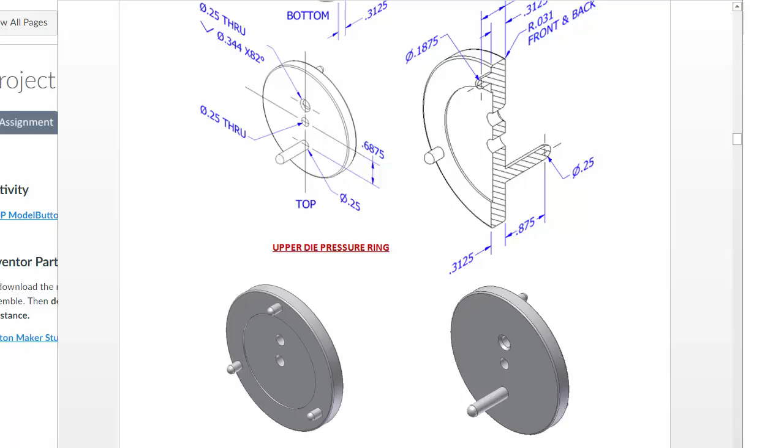We know the cylinder has some diameters here. We have a diameter of 3.0625, and then there's a smaller cutaway of 2.0625 that has a depth cut of a very small amount on it of 0.031. So I'm going to begin by creating that.

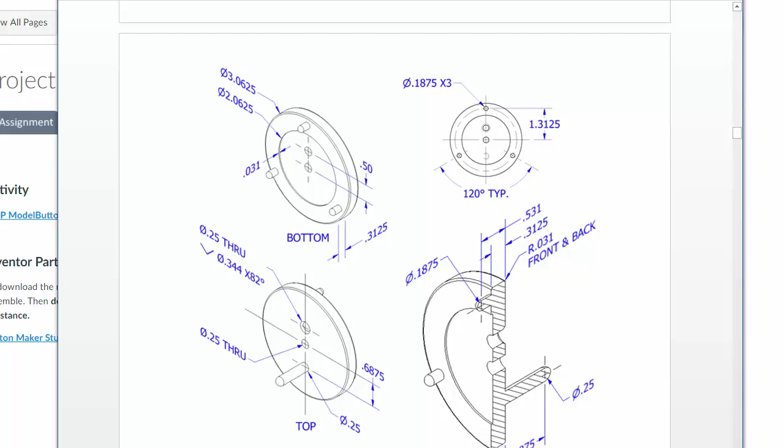In Inventor, I'll create a new sketch. I'll go ahead and build it on the XY plane, and because it's a cylinder, I just want to make sure that my center point is the center origin here. That'll save me a lot of trouble later on usually. And I'll begin with 3.0625.

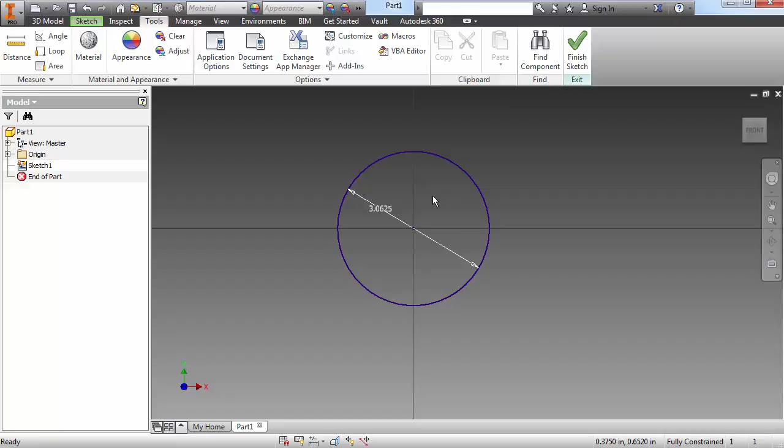You'll notice that it only goes to 3 decimal places by default in Inventor. The number is correct, it is to 4 decimal places here, it just rounds it up for you visually. You can change that if you come into Tools and choose Document Settings, then come over to Units and set your precision to 4 decimal places. Then when I apply this, it'll show me the correct number of decimal places. So that's something nice to do.

I'll finish the sketch and extrude that, and I'll extrude this one 0.3125, and then I'm going to build this smaller and extrude that, the smaller cylinder here, and extrude that in.

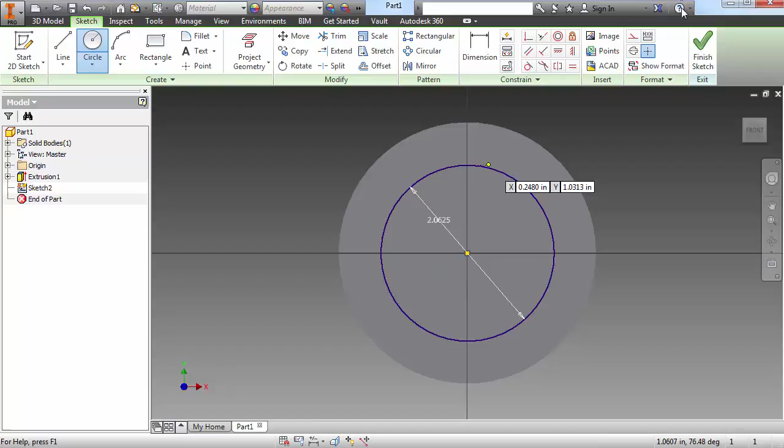So I'll come here with the same center point of 2.0625, and then I can extrude this with a cut here, and it's only got a depth of 0.031, and that gives me that correct depth cut.

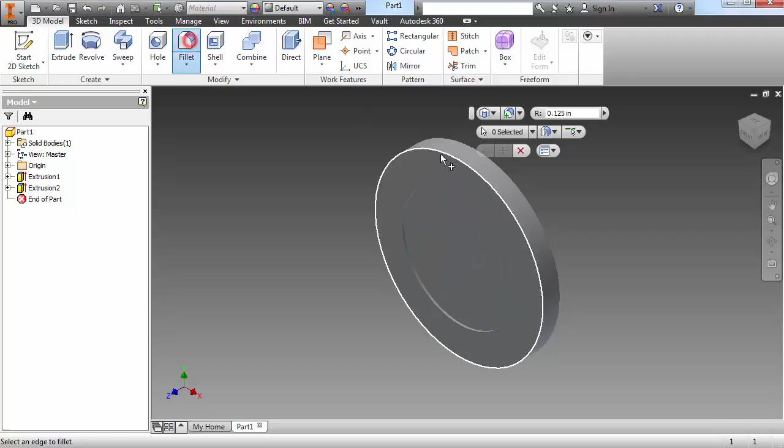Now there's a couple of other things I'll need to do. There's a fillet of 0.031 on the front and the back, so I'm going to come here and do fillet, and I've got right here 0.031. Do that again, I've got a fillet here and here, and that should be good for the cylinder itself.

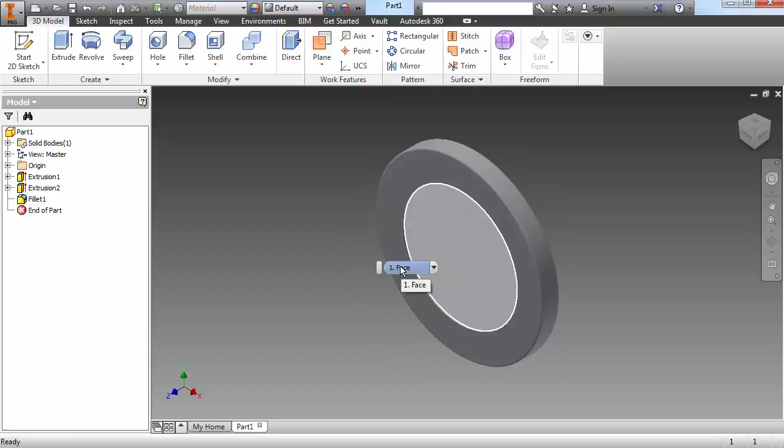Now I need to start building these extrusions that are all the way around. These are equally 120 degrees from each other, so all I need to do is build one and then use a circular pattern to make a pattern of the feature for the others. So let's begin with that one.

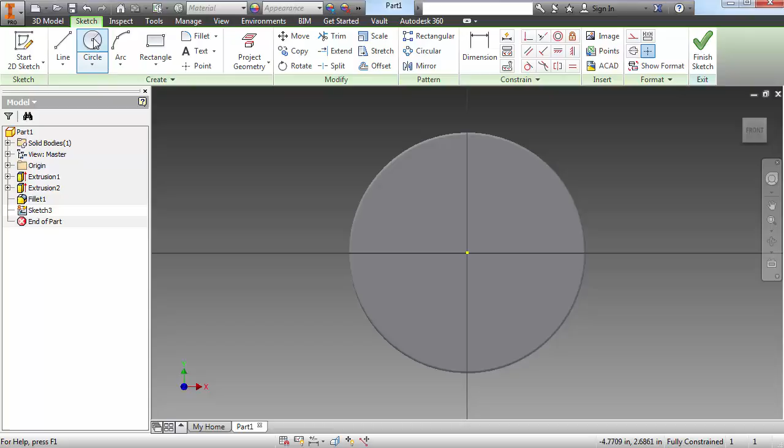I know a couple of things about this. I know that it is on a vertical axis straight from the center point, and it's 1.3125 up from there. So I'll go ahead and build a new sketch here, build a circle of some size right here, and the distance when I hit D and dimension between the center circle and up here should be 1.3125. The diameter of this circle here will be 0.1875.

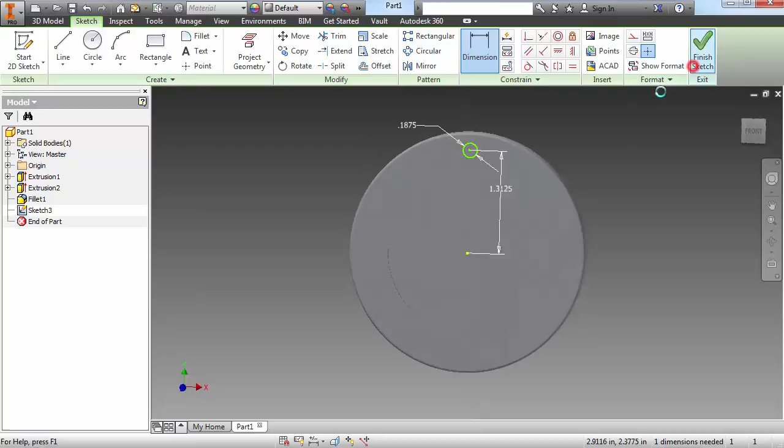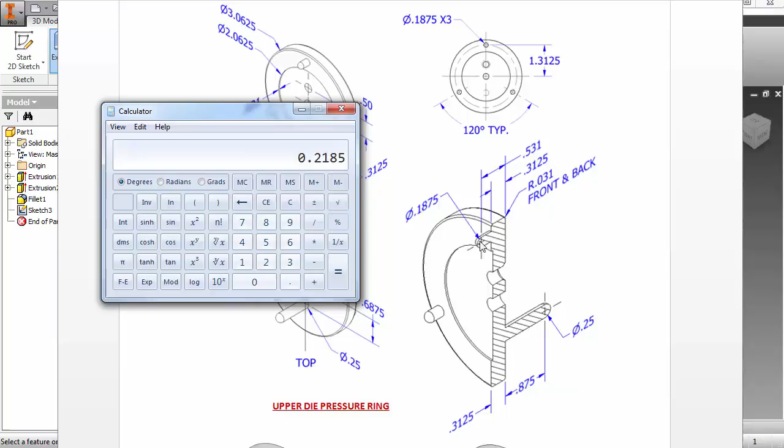Now I will extrude that. From the back of this to where the fillet begins is 0.531. So if I take 0.531 and subtract the thickness of the cylinder of 0.3125, that gives me a distance from this edge to the center here of 0.2185. So I'm going to extrude this out 0.2185. Is that what I said? Yep, okay, then I've got that.

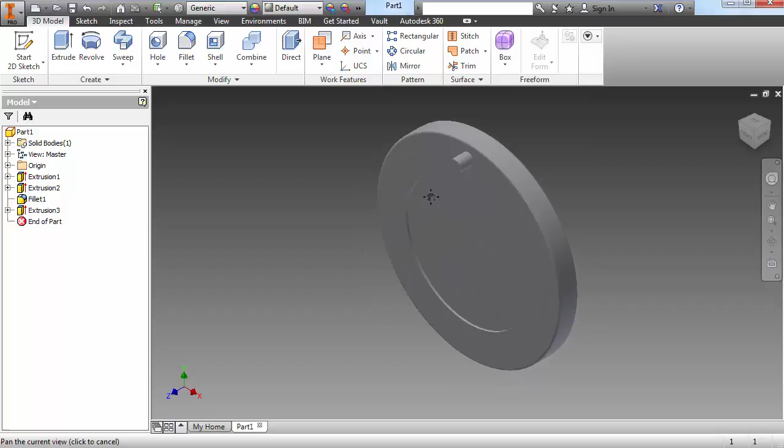Now, to build the extrusion or the fillet on this, I need to extend this out a little bit more. So I'm going to go ahead and build a work plane right in the center of that. I'm going to choose my work plane, and in my origins, that YZ plane origin should already be there. So I'll create a work plane right in the center here, and then click on the edge of that work plane and create a new sketch on that.

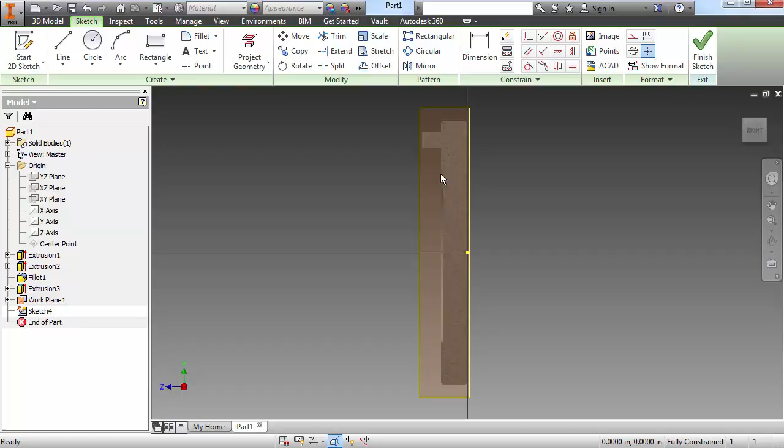And I'm going to press F7. F7 allows me to do a cutaway, just a temporary one for the purposes of this. So now my work plane is cutting away there, and you can see what it does to show you that that material is gone. And now I can create, I'm going to project this thing.

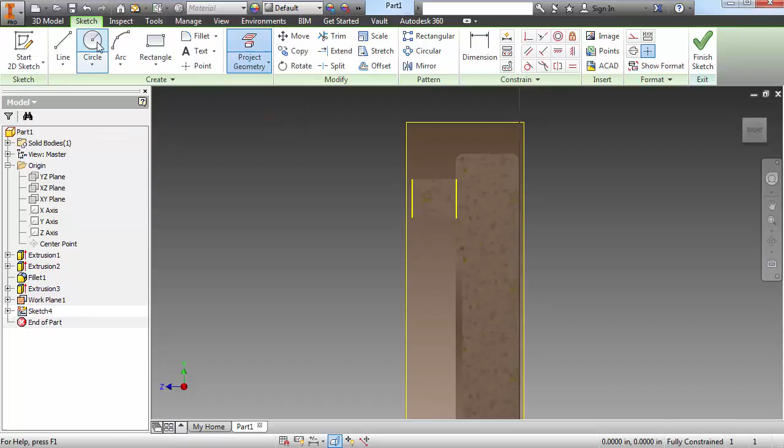And I'll build a circle here. I know that circle starts here, and I'm assuming it has a diameter of 0.1875, just like that. Now I'm going to revolve this on the top, so I only need half of this circle, which should already be the right size because the center is here and I dragged it out to the edge of this.

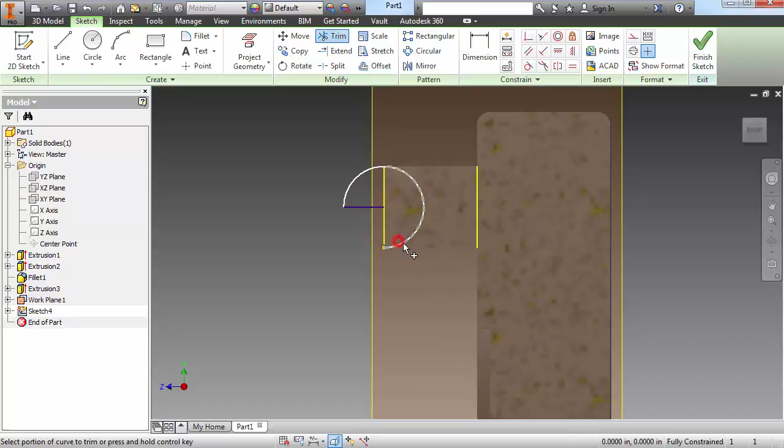But if I just draw a line here, use the line tool to draw this, then I can press X and trim the parts I don't need, and that should be fine. And now I can revolve this half of that shape around there. So I'll choose revolve.

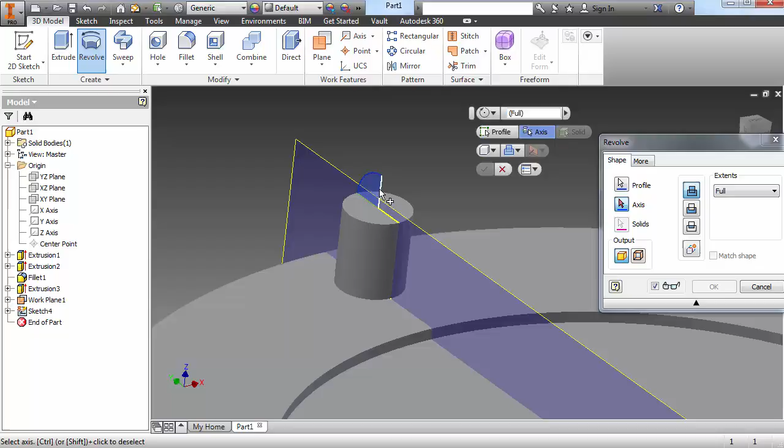It already found that profile because that was the only one available, and now it's expecting me to give it the axis. This red arrow represents information it needs, and the axis is going to be this center line here. When I click OK, that should cap the top of that.

Now I can't delete this work plane because it's needed to create that thing I drew, but I can right click on it in the browser and say visibility off, and that's all I need to do for that.

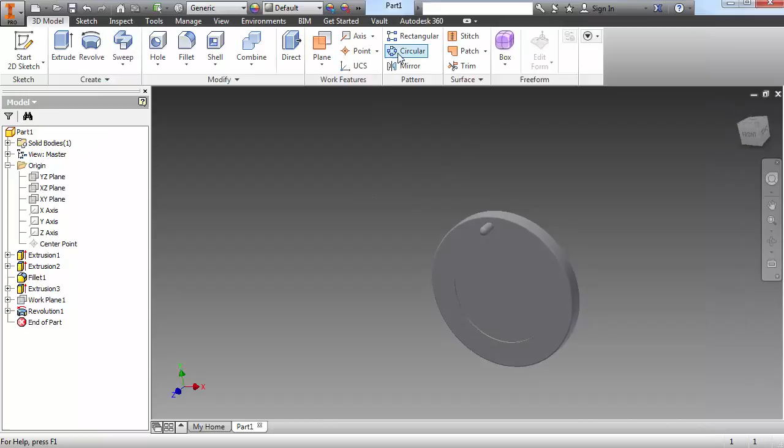Now I know there are two other ones of these. They are equidistant from each other, all 120 degrees around this center point, which means I can use a circular pattern here. I'm using a 3D feature circular pattern. The feature is both the cylinder and the revolve on the top, so I need to make sure to select both of those.

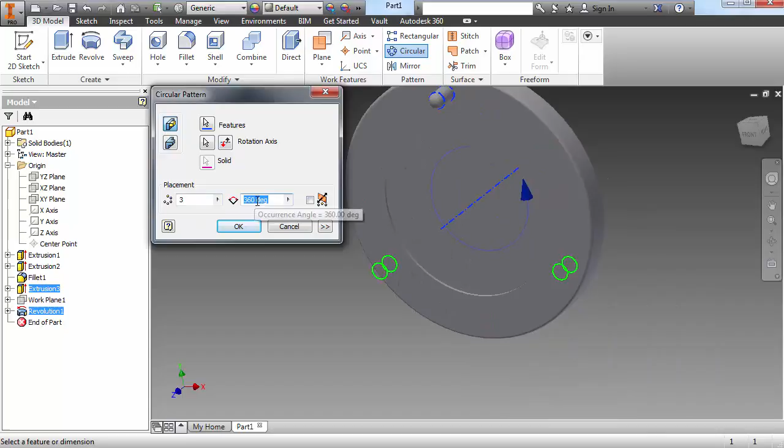The rotation axis is just any other circle. I can click on any rounded surface that shares the same center point, which should be everything else. If I click on this now, that should share that same axis. I only need 3 of them, and 3 at 360 degrees will give me my 120 degree angles, and that's that part of it.

Now I need to do basically the same thing on the back. There's a much farther away one. It is on the other side, but it is also along that vertical axis, vertically centered on the circle.

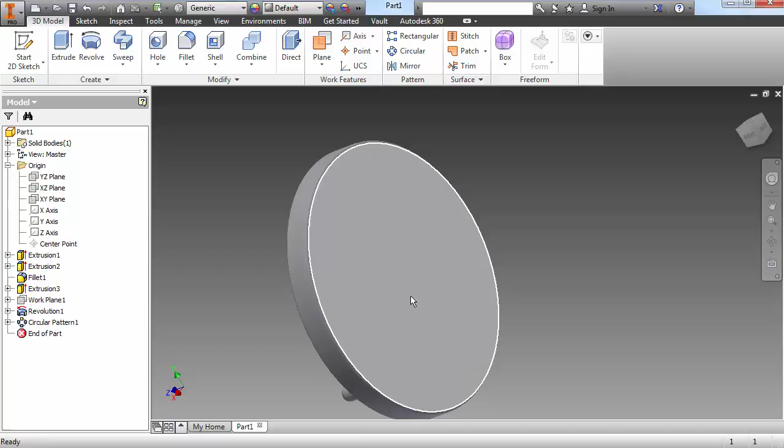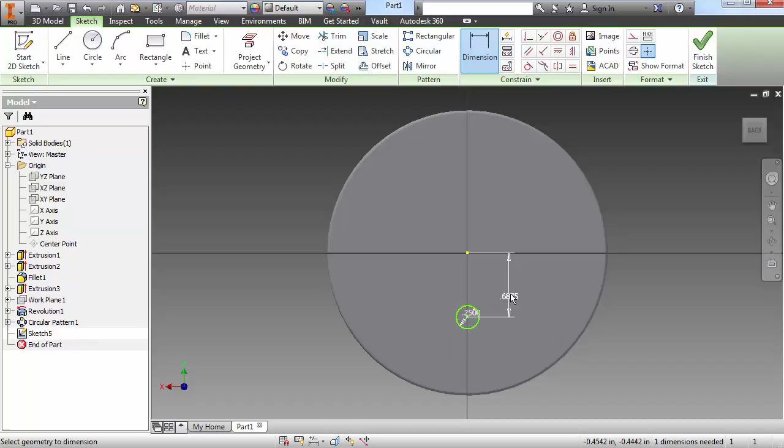So I'm going to go around on the back now, build a new one, and this one is down on this axis. It has a diameter of 0.25, and if I dimension from the center to the center of this circle, this distance should be 0.6875. That one will be extruded a distance of 0.875.

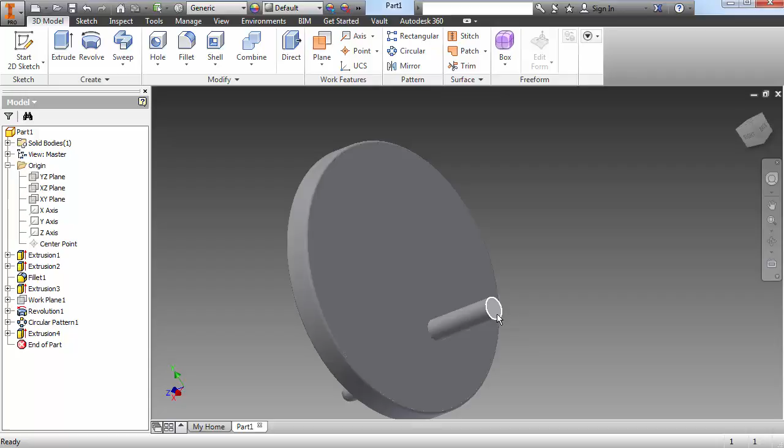And I once again have to cap that using the same process, and I should have my work plane. If I turn that visibility on again, that work plane should be the exact same work plane that I need.

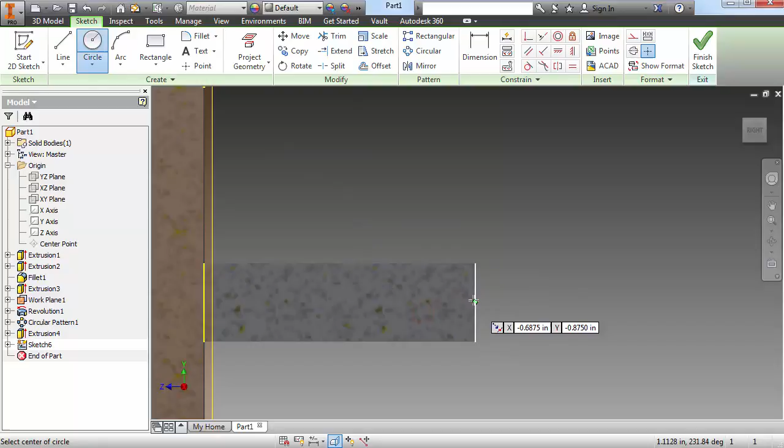So I'm going to create a new sketch on that same work plane, hit F7 to cut away, use project geometry to get those edges again, and now I'll do the same thing. I'll find that center, because I projected this line, I can find the center of it where that green dot is.

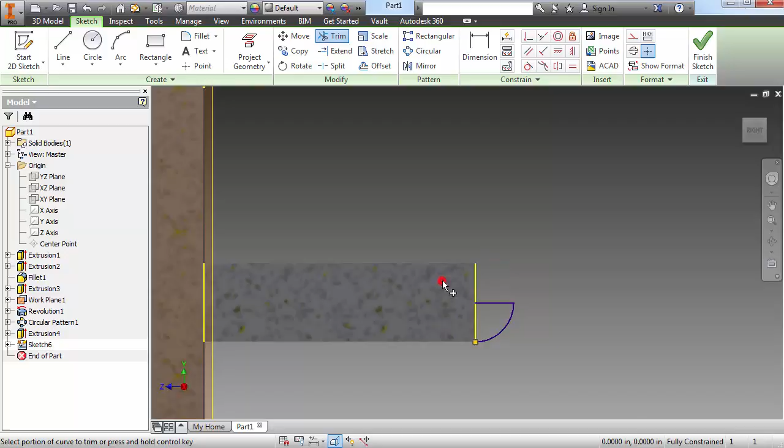I'll drag a circle out that's exactly the same diameter as this rectangle, or the cylinder that's here, so I'll go all the way to the edge. I'll draw half of it again because I'm going to revolve it. I don't really need to do this, but I'll go ahead and hit X and trim these again. Now I can revolve that profile around this axis, creating that other one, and then I can turn the visibility of the work plane off again.

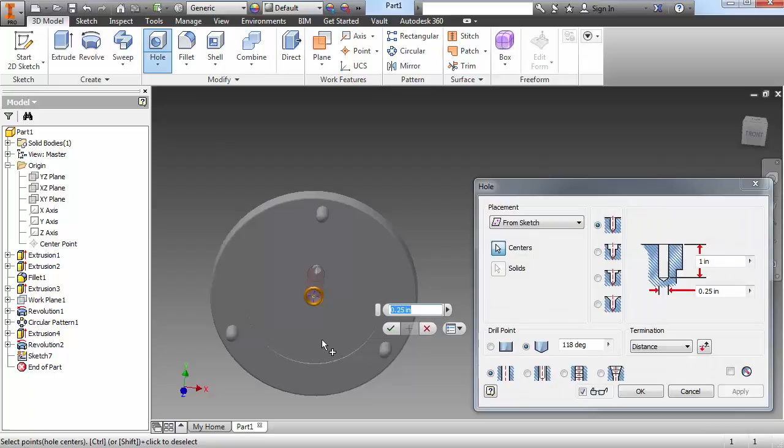And the last thing I have here are 2 holes right down the middle. So I'm going to use the point tool to create the first hole, finish that sketch, use hole. It is a through hole, so the distance is through all, and it has a diameter of 0.25.

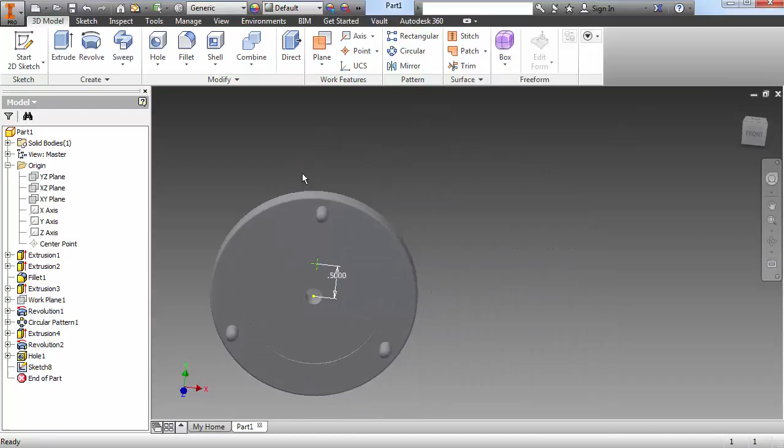And then there's a second hole here that's just above that, above it 0.5, so I'll make another point, make it 0.5 up from the center. This one I could have done an extrude with a cut on that other one, but this one is a countersink, so it would be much easier to do this using the hole.

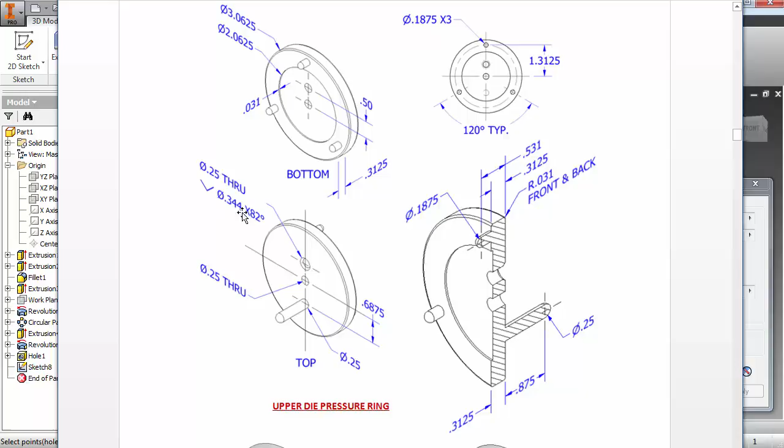So I choose hole, it finds that center point again, and now I want it to be a countersink. I already know the information about it, I'm told it through here. Everything after this countersink symbol is the geometry for the countersink, so it's got a diameter of 0.344 with an 82 degree angle, and then the rest of it is a 0.25 diameter hole that goes all the way through. So I'm just going to put here 0.344, it's 82 degrees already, and the rest of it is 0.25 through.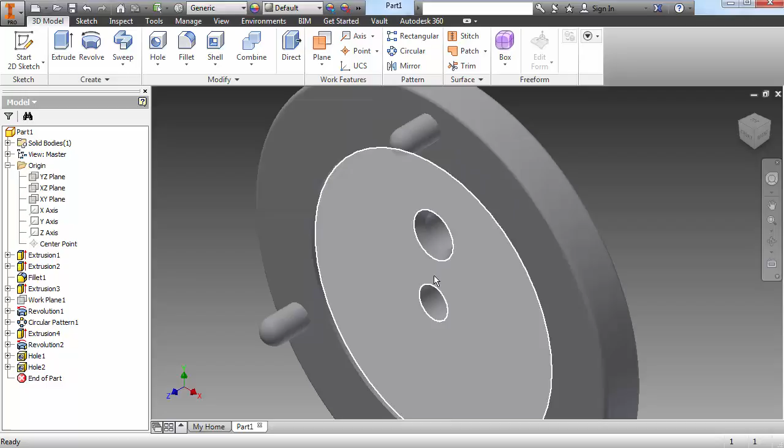I click OK. Oh, and I goofed up because the countersink is actually on the other side, so ignore that I did that. I'm going to delete this hole from there, and I just want to build it on this side instead. Would have been better if I'd done that in the first place, but I didn't catch it.

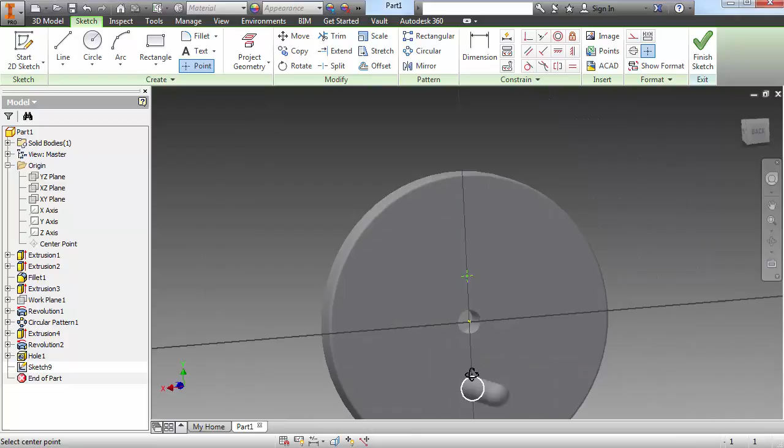So I'm going to do a point again. It is the opposite of this long extrusion there, so I want to make sure it's in the right place. It's 0.5 up. Now I'll do exactly the same thing, but now it'll be countersinking from the other side. So now that should be correct. I can look at it from both sides.

And that is how you create the upper die pressure ring for the button maker.